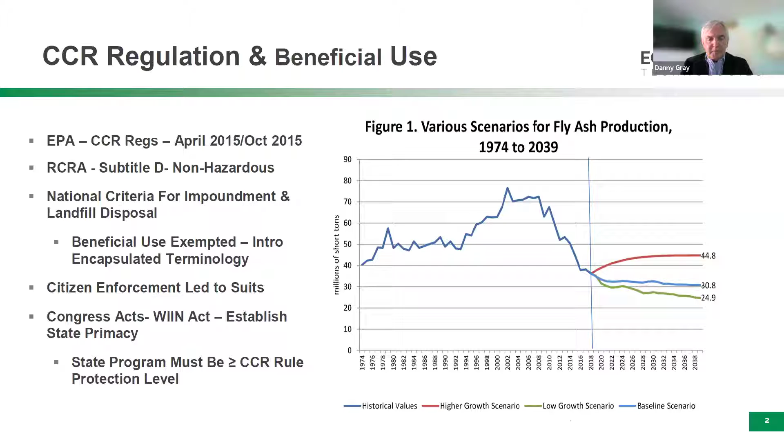Basically, in terms of what coal ash is and how it functions within the recycling industry or the mineral resource field, I refer to coal ash as 50 million year old dirt that happened to settle out with the organic matter 50 million years ago when the coal bogs were being formed. That mineral, the natural erosion soils of the time, ended up being nested in with the coal. When you burn the coal, the mineral component does not combust, and it turns into either fly ash or bottom ash. The organic material is fired in the boilers, and it leaves the mineral component.

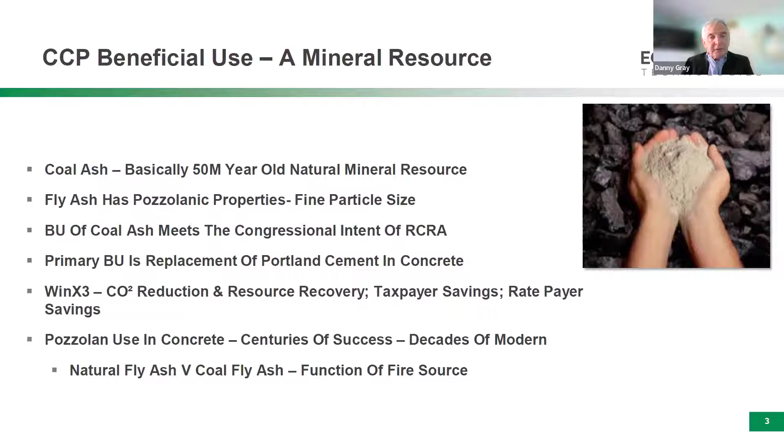Natural fly ash versus coal fly ash is really a function of the fire source. If you look at it in a simplistic way, natural pozzolan is volcanic ash, which basically had the heat of Mother Nature there to form it. Coal fly ash is basically a function of burning of the coal, which is just a slightly different source of the fire. So next slide.

To give a quick reference to how coal fly ash is used in concrete: concrete is the second most consumed substance in the world behind water, approximately 14 billion cubic meters per year. Roughly 40% of the concrete used in the U.S. is used for residential infrastructure projects, and industrial commercial construction is the other component. So it's a valued resource that we have a lot of emphasis on.

Concrete obviously is a critical material for society on a global basis, and the use of concrete is projected to continue to grow. In the United States, we use 100 million plus tons per year of Portland cement, and fly ash typically has a replacement ratio of about 20%.

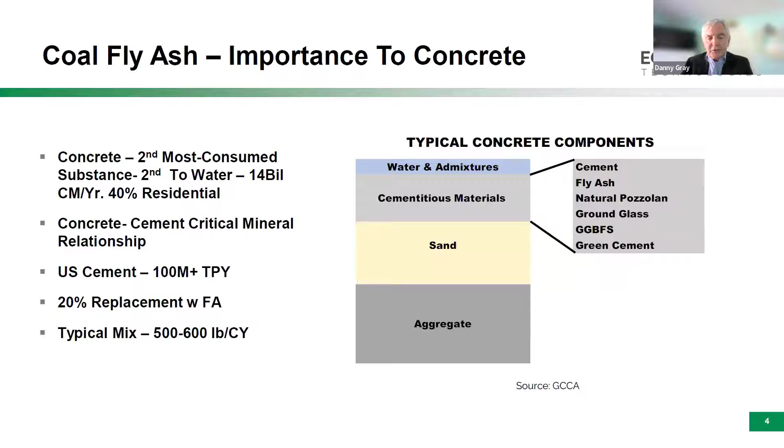If you think about concrete in the diagram there, for the major components you've got the cementitious component, which is either cement or one of those subsets you see to the right. Within a cubic yard of concrete, you have sand, aggregate, water, and some admixtures. Typically the cementitious component is 500 to 600 pounds on average per cubic yard, and you can take out about 100 pounds of the cement and replace it with 100 pounds of fly ash. That's just a quick summary. Next slide.

So the trends impacting today are that, as we all know, the number of coal-fired power plants in the United States is reducing. Cement on a worldwide basis is under intense pressure to reduce the CO2 footprint of manufacturing Portland cement. In general, a little less than 1 ton of CO2 is generated for each ton of cement manufactured. It's a process that requires heat and has some internal release of CO2.

On a worldwide basis, USGS estimated that 4.1 billion metric tons of cement are produced, and we're going to have 5 billion tons produced by the end of this decade. You can see the country origin of production; China obviously dominates cement production worldwide. Fly ash is in most concrete and is used to reduce the CO2 footprint of the embedded concrete. In the U.S., we have roughly a 16% replacement of fly ash today.

The cement industry is also working on advanced technologies to reduce the CO2 or the clinker ratio in cement by using lime. I would like to talk about some examples on the new technology side: the industry is changing both from a CO2 perspective as well as in the materials being used on the cementitious side. We have manufactured SCMs, or supplementary cementitious materials, that include coal combustion products, but also natural pozzolan inputs.

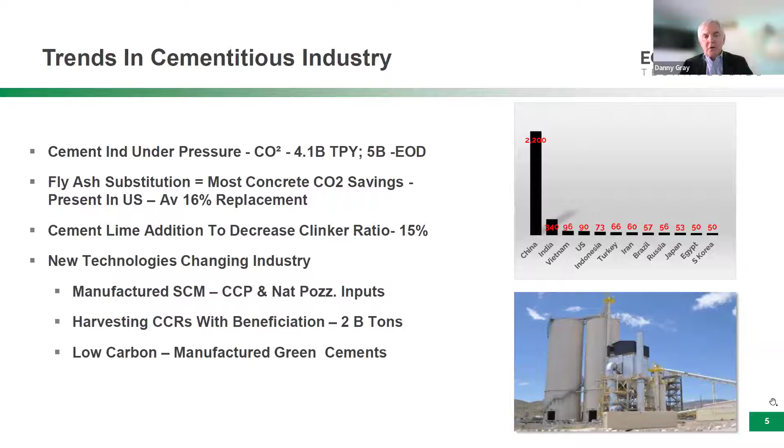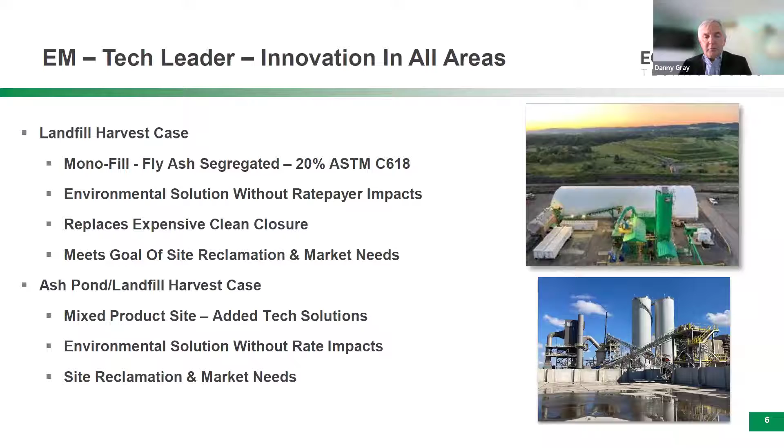Low carbon manufactured cements are on the cutting edge of new green cements. So we'll talk quickly about some of those. Next slide. Just some projects that we're working on: in the upper right-hand side, we're basically mining a landfill in order to reuse the fly ash as a 20% replacement material. It offers an excellent environmental solution without ratepayer negative impacts. It replaces expensive clean closure, meets the goals of reclamation and fulfills the market needs in that area. In the bottom right, we have harvesting cases where we're mining either bottom ash or ash out of impoundments and doing the same thing. Next slide.

In the field of advanced green cement, in our company's case, we manufacture a low carbon footprint green cement that uses coal fly ash as an input and avoids the landfilling. We are actually able to manufacture a product that has a 50% replacement ratio. So instead of 600 pounds of cement in that cubic yard, we would replace 50%, or 300 pounds of cement in that cubic yard. And that is a way to help reduce the embodied CO2 in the material.

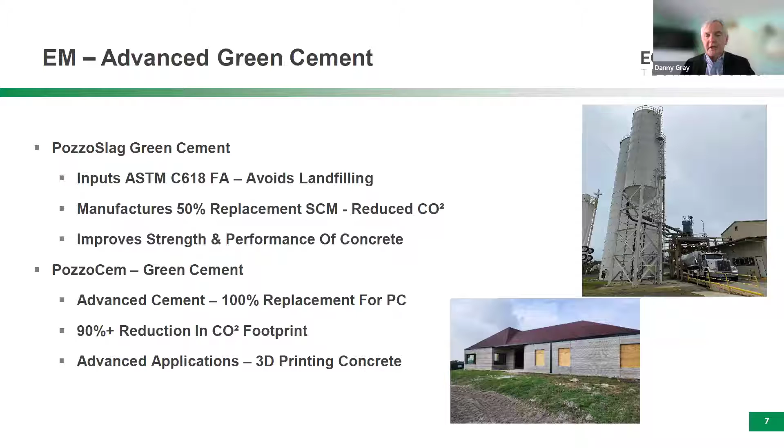There are advanced materials that you see pictured in the bottom photo for green cement. That's a 100% replacement for cement. What you see there is a house that was printed with a 3D printer using this ultra low carbon cement out in the Austin, Texas area. So these are examples of where the market is moving and some of the trends that we see happening. Next slide. And that was it.

I'll stop and turn it back over to Mary. Thanks. Thank you so much, Danny. And we will just go straight into Mr. Goodlow's presentation. Thank you very much. First of all, I want to apologize for my hoarse voice. I've developed a cold over the last day or two, but I think I can get through it.

Go ahead. So I'm just going to do a brief overview of who my company, Cemex, is, and why coal ash products are important to us. Cemex is a global building materials company that provides high quality products and reliable services with a rich history of improving the well-being of those it serves through innovative building solutions, efficiency advancements, and sustainability efforts. That is straight from our website. Our company was founded in Hidalgo, Mexico in 1906, so we're approaching 120 years old. Next slide.

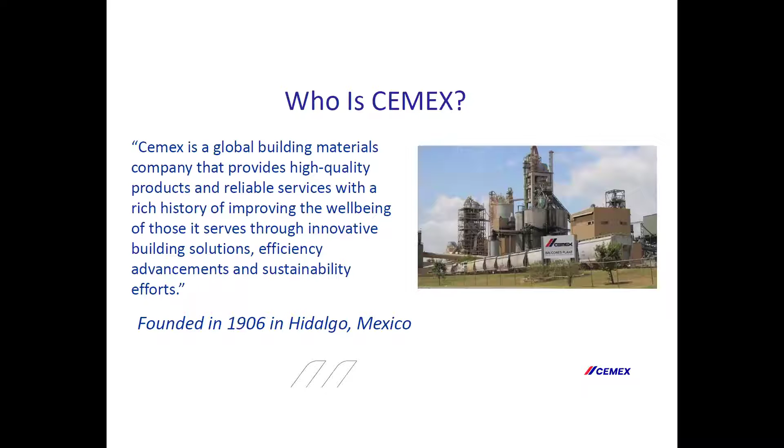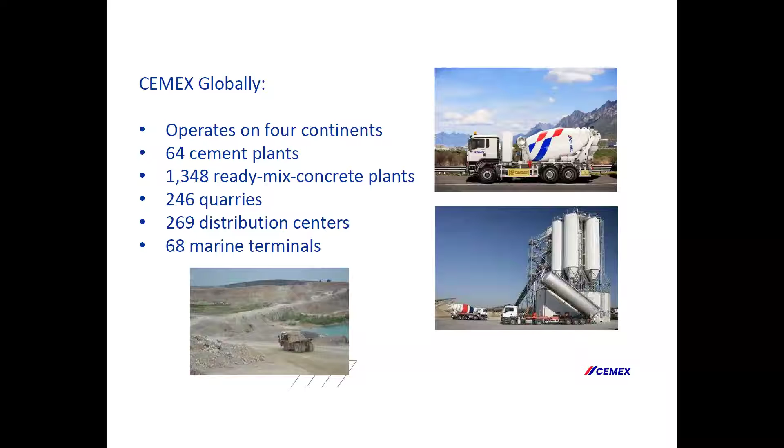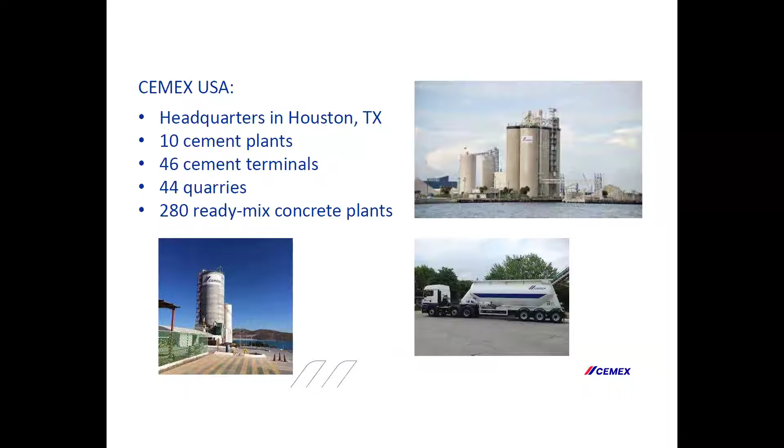Cemex has a worldwide presence. We operate on 4 continents. We are a cement producer, a ready-mix producer and an aggregates company. We've got 64 cement plants, 1,348 ready-mix plants, 246 quarries, 269 distribution centers and 68 marine terminals. So we have a presence all over the world. Next slide. Cemex in the U.S. is headquartered in Houston, Texas. We have 10 cement plants around the U.S., 46 cement distribution terminals, 44 quarries, and a little bit more than 280 ready-mix concrete plants around the country. Next slide.

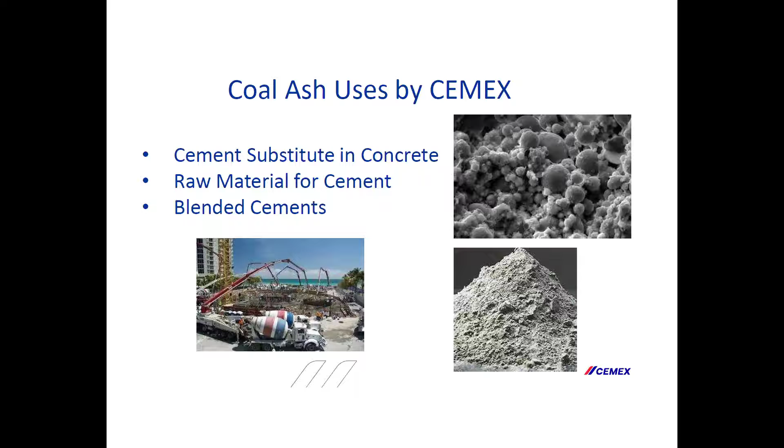So I just want to talk about why coal ash is important to Cemex and the concrete and cement industry in general. Next slide. So how do we use coal ash at Cemex? Some of this will repeat things that Danny mentioned, but it is a cement substitute in concrete. We try to use it in as much concrete as we can. It also might be used as a raw material for our cement plants and as a finished product for producing blended cements. Next slide.

So in concrete, and as Danny explained, from a coal plant, you get the fly ash that comes out the exhaust gases from the combustion process, and the bottom ash would come out the bottom. But fly ash is composed of silica and alumina along with some calcium. And as he mentioned, it's a pozzolan, which means that on its own, it might not be that reactive, but the silica and alumina from it will react with the byproduct of calcium hydroxide from cement that'll produce more cementitious

material. And fly ash might be classified as one of two different types, Class F ash, which has very low calcium, or Class C, which is a little bit higher calcium content. And whether it's one or the other depends on the source of the coal being used or burned. Next slide.

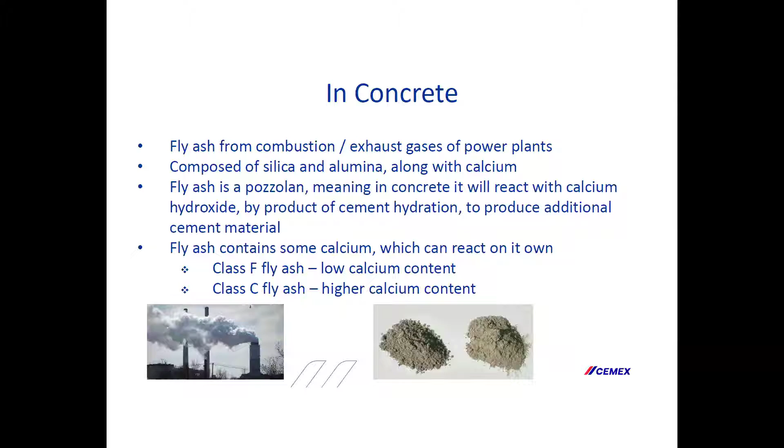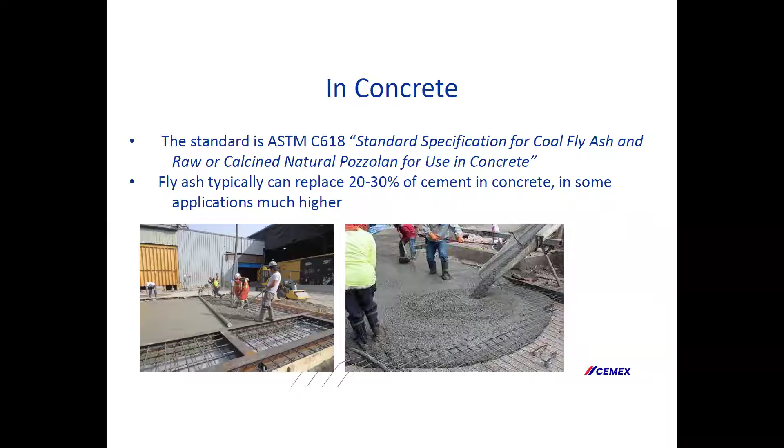So in concrete, there is a standard for fly ash that's used in concrete. It's ASTM C618, which is standard specification for coal fly ash and raw or calcined natural pozzolan for use in concrete. And when it's available and when we can use ash in concrete, typically we use it at 20 to 30% replacement for the cement in the concrete. And in some applications, it might be much higher, as much as 50% or more. Next slide.

So for concrete, for Cemex, as I said, we have 280 concrete plants around the US. And fly ash is vitally important for us. We use it wherever possible. The whole concrete industry wants to use it whenever possible. It's not always available in certain areas if there's not power plants close by. So it's a market specific thing.

But it also enhances properties in concrete. I think early on fly ash was probably used more for economical reasons, the price of it compared to cement. But we've learned that it has very valuable properties to enhance concrete, such as sulfate resistance, which helps when concrete gets placed in soils that are high in sulfates, which can attack the concrete. It's resistant to that. It's helped resist alkali silica reactivity.

And what's really become more and more important now is the fact that when we replace cement with fly ash, we're reducing the CO2 per yard of concrete. And I know some of you are familiar with what EPDs are, environmental product declarations. We're developing those now for our concretes where we determine the global warming potential in concrete. It's kind of like a food label where you show the ingredients and the calories and such.

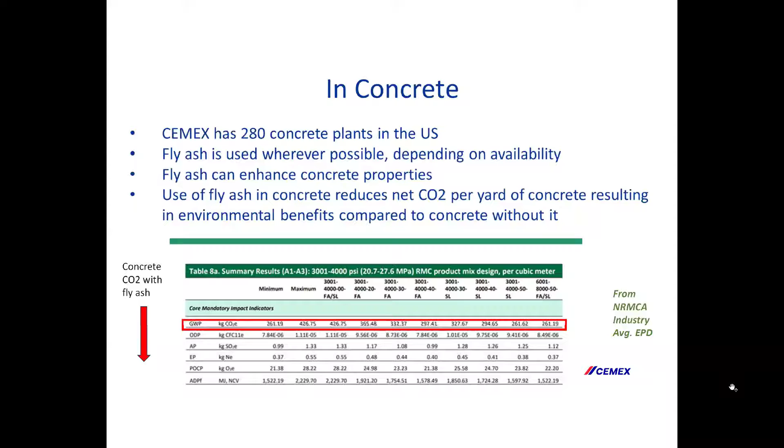We also, in some cases, use fly ash as a raw material because to produce cement, you need materials that contain calcium, alumina, silica, and iron. And fly ash could potentially be a good source for some of that. Whatever the source of materials we're using, we grind these up, we proportion them, and we feed them into the cement kiln at temperatures up to 2,600 degrees, and we basically cook it. And what comes out of the kiln is called clinker. We take that, and it goes to a finish mill along with some gypsum to control the set, and we grind it, we come up with cement.

But in some cases where the material's available and it's the right chemistry, we can use it as the source material in our cement plants. And we have a number of plants that are currently using sources of coal ash, be it either the fly ash or the bottom ash. So it's very important to our industry there. Next slide.

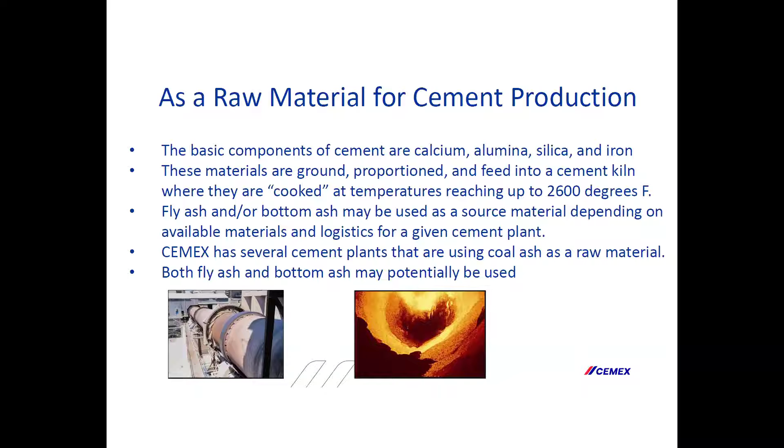Now, another use for these products that we are starting to see more and more of is blended cements. Cements historically are just Portland cements, which were just clinker from the kiln and gypsum, and you grind them in a finish mill. As Danny mentioned, we're starting to add limestone in it to produce Portland limestone cements. But there's also some other blended cement options that are allowed in C595, standard specification for blended cements.

We can take basically cement and fly ash and blend it, grind it in our finish mill, and produce a finished product that contains both the clinker or the cement and the pozzolan. And that would be classified as a Type IP cement. So that's clinker, the coal ash, and the gypsum. There's also a Type IT product, which is a ternary or three-product type of cement, which might have clinker, coal ash, gypsum, and additional products such as limestone or slag.

And so these blended products are becoming more and more important for the cement industry because it helps lower our CO2, which is very important. There's a lot of pressure on the cement industry to do so, and we're working very hard in these blended products to help do that and to lower our CO2.

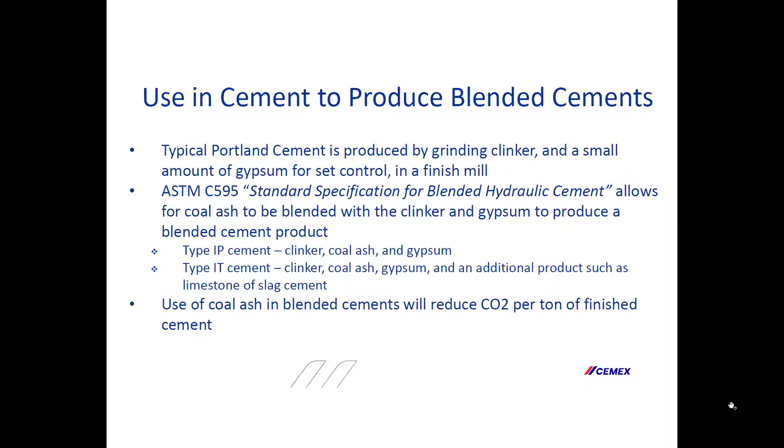Next slide. And so that's kind of the basic uses for Cemex and the concrete industry in general. And for Cemex, where do we get these products? Well, as we mentioned, the fly ash comes from power plants. If we're using the raw material, which may be the bottom ash, they also come from the power plants.

And for blended cements, it could be those same sources. But what we're also doing, and what Danny mentioned, is the use of recovered ash from waste ponds, which is going to be a very important source of material for our industry. As he mentioned, there's less and less coal burning power plants. The available material from that is getting less and less.

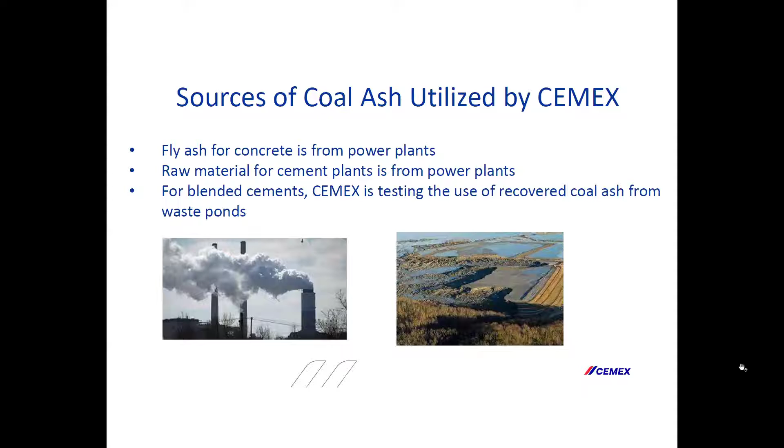And so it's going to be important for our industry to be able to utilize the ash. And there's millions and millions of tons of ash in the ground. And so at Cemex, we are looking at and have made trials of producing blended cement products with some of this recovered coal ash. Next, please. And I think that's it. Just a quick overview.

Thank you, Bill. Now we'll move on to Bill Easter from Simplastics. Thank you, Chairman Throne. Great hearing about how coal ash, fly ash has been used, and I learned a lot. It's quite amazing, quite successful as it's being used. So we're going to transition a little bit, look at a little R&D now. Next slide, please.

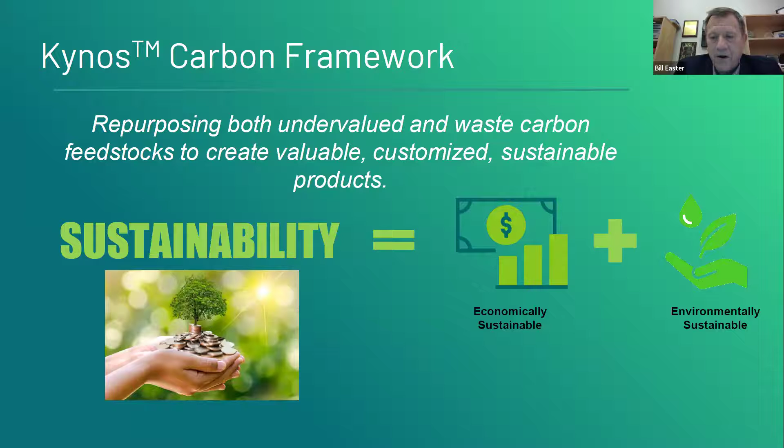And people talk a lot about sustainability, and they primarily mean environmentally sustainable. But as we know, if it's not economically sustainable, those subsidies go away, and then the benefit of those environmental actions can sometimes go away too. So for sustainability, it has to be both economically sustainable and environmentally sustainable. So how do you do that? Next slide, please.

So as you know, we're an R&D company doing a lot of different things. So on the left side of the figure, you see feedstocks, and there's different things that are either undervalued or they're waste. Produced waters, geologic waters, wastewaters, those come from oil and gas, spent graphite from lithium-ion batteries, CO2 gas, which we'll just touch a little bit because we're excited about that, coal and coal ash.

So we're going to talk about CO2 gas, coal ash specifically with engineered aggregates, carbon negative building materials, coal derived building materials, high temperature 3D printed filaments, and high performance plastic fillers. And we're going to really highlight high performance plastic fillers as something that we were successful to use with the coal ash. Next slide, please.

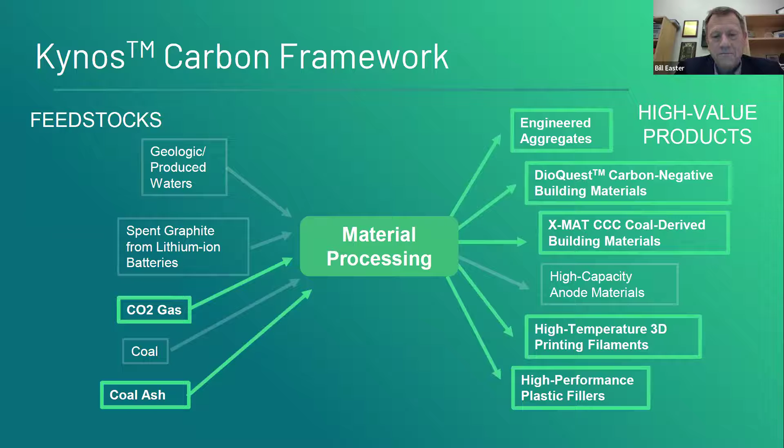So what kind of high value products can you make from coal ash? So we've completed a Department of Energy contract, $1 million federal share, $400,000 cost share. And we're using a technology called polymer derived ceramics. We use inorganic polymers for everything that we do.

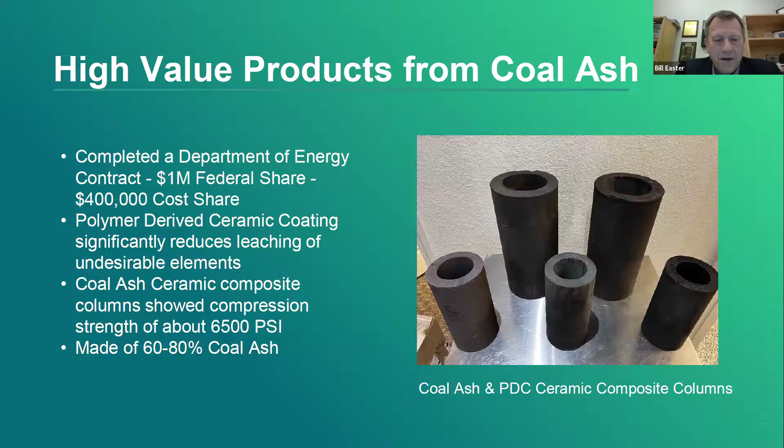And in this, the sort of plastic turns into a ceramic in a very cost-effective way, much more cost-effective than typical ceramics in terms of energy usage. So we put a polymer-derived ceramic coating, and we also significantly reduce the leaching of undesired elements. You can see on the right pictures of these columns that we made. The compression strength's about 6,500 psi, and they're made of 60 to 80% coal ash. Next slide, please.

This is taking the coal ash and putting it into plastic, and so we picked polypropylene. It's one of the two most known or used plastics, and so amazingly, if you typically buy polypropylene, you can get 30% mineral filling of it. We were able to put up 70% by weight. So you can imagine using a recycled polypro, which again is incredibly inexpensive, with fly ash, and being able to

turn that into products. So the PDC coated coal ash can improve the properties of the plastic it is loaded into. Actually, the stiffness doubled, and if you see on the left, the bar graph, the temperature of normal polypropylene is 201 F that we tested, and then you got almost an extra 100 degrees Fahrenheit in terms of heat distortion testing, and that's quite significant because 212 is boiling water. So what this says is this thing can survive that. And it's the same matrix. It's using polypropylene, but we're filling with 70% fly ash.

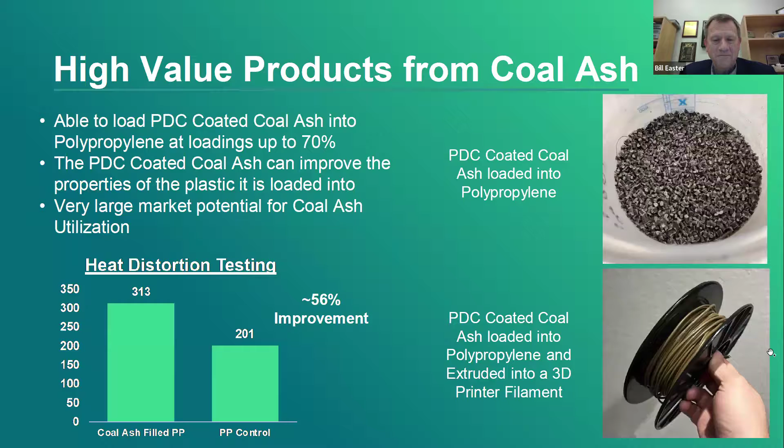So future work, what we're looking at, cooling tower plastics, protection barriers. Anyone in the audience has something else that they think we can do with plastics, we're happy to look at that. We're being written into, there's a power plant in Virginia, West Virginia, that they're studying. They have millions and millions of tons of fly ash, and they're looking to decommission this plant, and they're looking to work with us for what we might be able to do with that ash. Next slide, please.

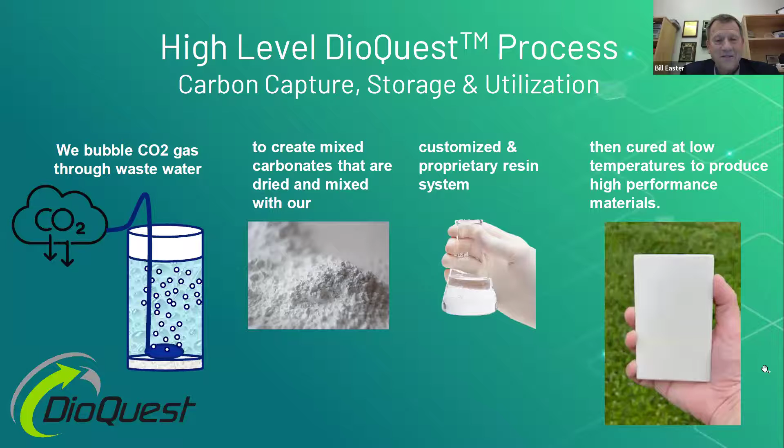And again, just talking about it, we're able to take any CO2 source, could be direct air capture, point source. Even the prototype you saw, we hooked up the carbon dioxide gas from a pickup truck. And the CO2 is permanently captured. It's almost like a synthetic limestone kind of process. And using it as an aggregate, we're not really concerned about the purity of it. It can have calcium, magnesium, strontium. It doesn't matter.

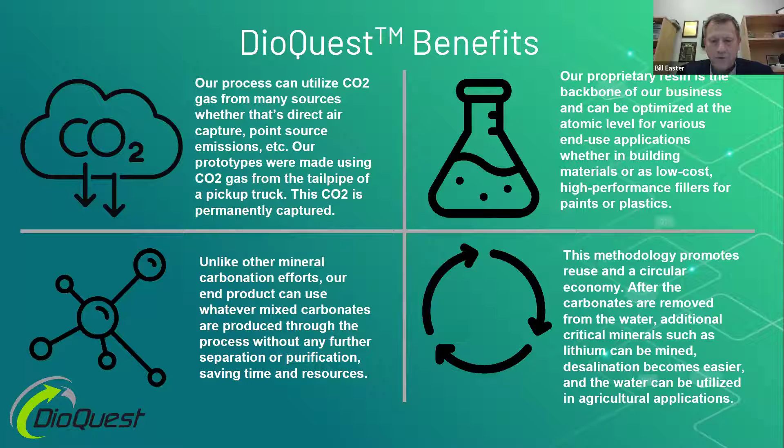And so this methodology allows you to take brines and those kinds of things and turn them into products. And then you can take the water and clean it up and either use it for agriculture, or if you do really good, you can make it potable. Next slide, please.

So the ask is, we've done this research, we have some great results. We're seeking partners to help move the technology from lab scale R&D towards implementation and commercial at a larger scale. Next slide, please. There's points of contact. There's our information if you have interest in this. And thank you so much for the opportunity to present our work.

Well, thank you, Danny, Bill, and Bill. That was just fascinating information. We have a couple of questions from the audience, so I think I'll go to those first. A pretty general question. How much fly ash is being taken out of landfills today? And similar question for bottom ash.

Sure, I can take a stab at it. I think it's the American Coal Ash Association that does that type of survey in terms of the beneficial use of coal combustion byproducts for various applications. They don't report how much is removed from landfills right now. However, that is changing, and in future years they will publish that. I will only give what my estimate, or our estimate, is. We estimate that there's probably less than 4 million tons of fly ash and bottom ash that comes out of landfills today that's going into a beneficial use.